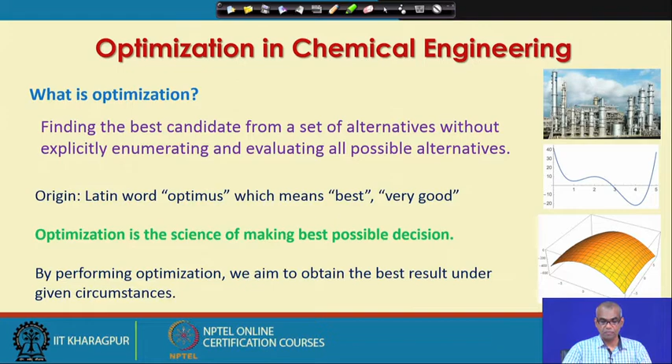So, why do you want to optimize? In general terms, we want to improve the process to realize maximum system potential. We want to attain new or improved or more efficient designs. We want to maximize profits. We want to reduce the cost of production. Maybe we want to minimize the harmful effect on the environment.

In chemical engineering, we would like to perform optimization to utilize raw materials or resources, energy, utility in the most efficient way. Also to reduce waste generation, minimize the environmental impact, to determine the most desirable operating conditions, to determine the safe operating conditions, to meet product specification, to maximize profit.

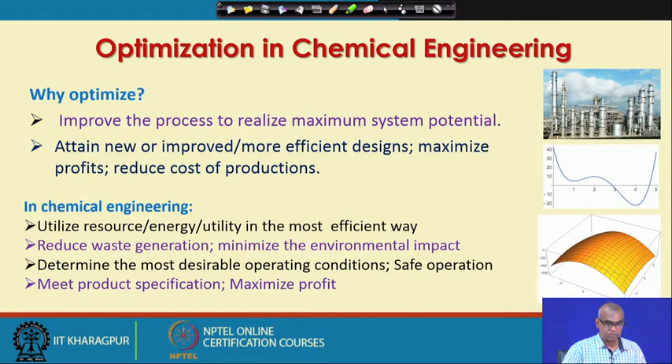So, the benefits of optimization in a chemical process plant may be improved plant performance. So, in plant operations, benefits of optimization arise from improved plant operation or performance, such as improved yields of valuable products, reduced energy consumption, higher processing rates, reduced maintenance cost, less equipment wear and longer times between shutdowns.

So, with these descriptions, we find out that during optimization, we want to maximize or minimize something. Oftentimes, we want to maximize, say, profit, we want to minimize cost. But it is not necessary that we will maximize or minimize an economic criterion. We can also maximize or minimize a technical criterion.

Let us now look at the picture of this distillation column. So, it is a schematic of a simple distillation column with one feed stream that enters somewhere in the middle of the distillation column as shown in the schematic. The vapor comes out from the top of the distillation column, is condensed using a condenser, and gets accumulated in the reflux drum. A part of it is taken out as the top product and a part of it is sent back to the distillation column as reflux.

Similarly, at the bottom of the distillation column there is a reboiler. So, the bottom liquid stream that comes out of the distillation column is vaporized using the reboiler and enters again into the distillation column. A part of the bottom product is taken out as product.

Now, what are the optimizations that can be performed in this single distillation column? If you have done a course on separation processes or mass transfer operations, you have seen that there is an optimum location of the feed tray. So, this feed stream has to be put into an optimal location. You also perhaps have seen that using this reflux stream, it is possible to control the purity of the top product.

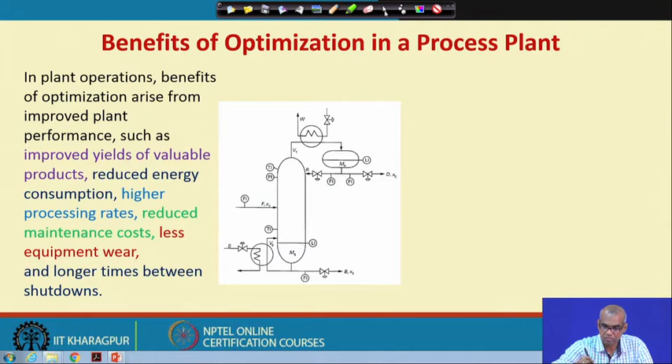So, let us take a look at a few more examples of optimization from chemical engineering. Design of heat exchanger network is an important optimization task for chemical engineers. Real time optimization of a distillation column, model predictive control. This is basically a control algorithm, but the control algorithm works on the principle of optimization. So, model predictive control basically uses a predictive model for a process and uses optimization techniques to establish the control of the process.

Operations planning and scheduling is a very important optimization task. Equipment sizing, scheduling maintenance and equipment replacement. Operating equipment such as reactors and columns, you have to design them in the most optimal manner possible. Optimal shutdown and optimal startup of plants are also important optimization tasks of practicing chemical engineers. So, these are just some of the common optimization problems chemical engineers frequently deal with.

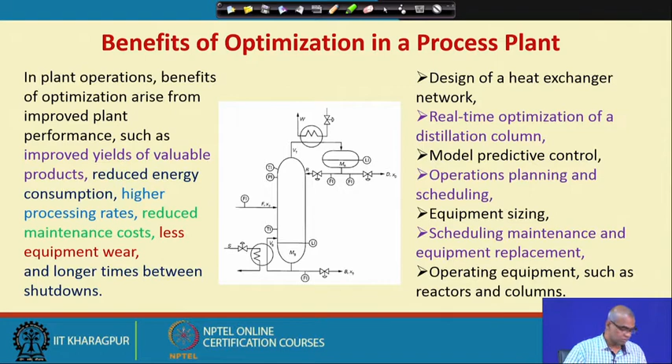These are some optimization examples where we have learned from nature. See, the wings of the aeroplane, or the design of the wings of the aeroplane, has been inspired by the birds. The nose of the high speed train is inspired by the beak of the kingfisher.

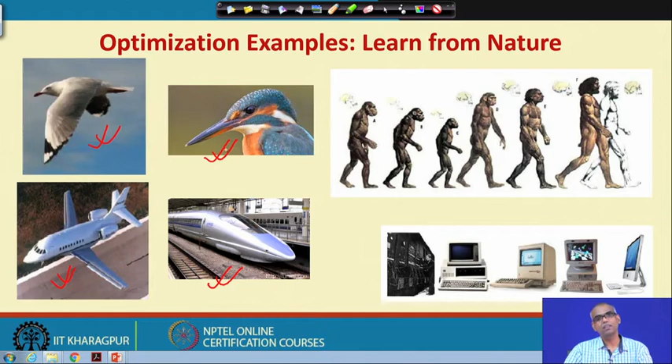You are familiar with this figure. You must have noticed this figure in your biology book. This shows human evolution, and this shows the evolution of our computers, with this being the modern desktop computer.

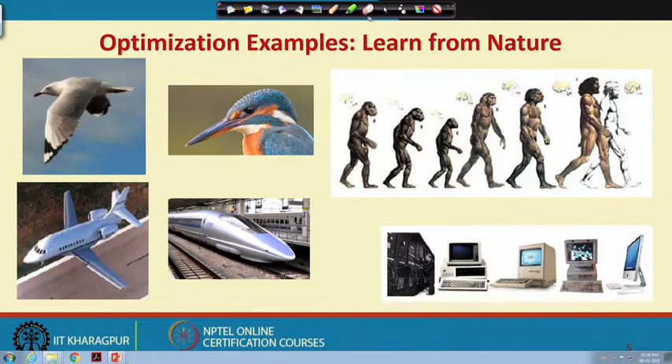So, let us now briefly talk about the outline of the course. In the first week, we will talk about introduction to optimization. Week 2, we will talk about optimization problem formulation. Week 3 and 4, we will talk about basic concepts of optimization. Week 5, 6 and 7, we will talk about unconstrained single and multivariable optimization.

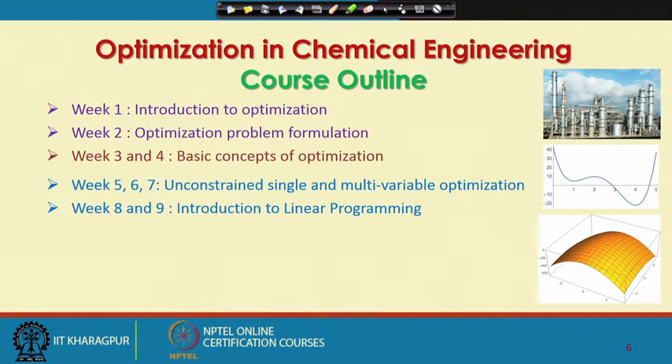Week 8 and 9, we will talk about linear programming. Week 10, we will talk about constrained nonlinear programming. Week 11, we will talk about applications of optimization, where we will talk about various case studies and apply the techniques that we have learned till week 10. And finally, in the last week, week 12, we will introduce certain software tools for performing optimization.

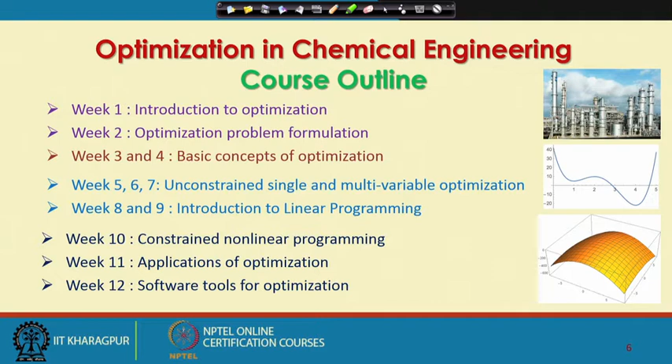These are the textbooks or reference books that you can follow. First book is Optimization of Chemical Processes by T. F. Edgar, D. M. Himmelblau and L. S. Lasdon, second edition, McGraw-Hill. Book number 2, Engineering Optimization: Methods and Applications, written by A. Ravindran, K. M. Ragsdell and G. V. Reklaitis, second edition, Wiley India. Book number 3, Engineering Optimization: Theory and Practice, S. S. Rao, fourth edition, John Wiley and Sons, Incorporated.

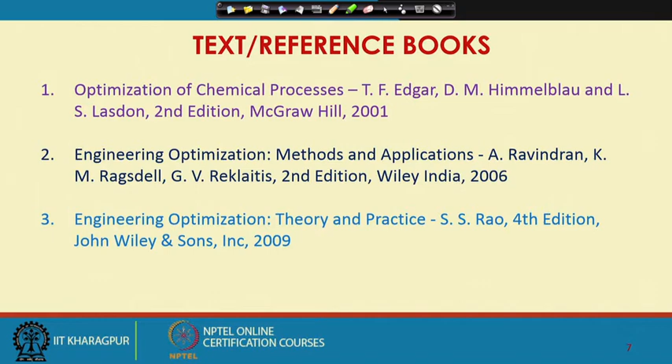So, our discussions will essentially be focused on these 3 books, but I believe you can follow any of these books. The first book, Optimization of Chemical Processes, is written by chemical engineers. The second book, Engineering Optimization: Methods and Applications, is also written by at least one chemical engineer, G. V. Reklaitis. Engineering Optimization: Theory and Practice by S. S. Rao is also a good book, but most of the examples in this book will be from civil engineering or mechanical engineering disciplines.

Optimization is not only for chemical engineers. Optimization by itself is a discipline, and this has wide areas of applications. Just to name a few: production planning, important for large scale production. You have to choose the best plant site, you have to choose the most favorable operating conditions. Transport and logistics. Optimization plays a very important role in the business of transport and logistics. Important problems are routing of vehicles, like routing of trucks, allocation of empty wagons, fuel transport, etc. Packing problem is another classical optimization problem. Design of cargo space is an important practical problem.

Telecommunication: design of network, frequency allocation of a mobile network are important practical optimization problems. Traffic planning: here traffic signal control is an important optimization problem. Structural design, such as mechanical design. Preparing timetables, staff control of your organization, are important optimization problems. Portfolio optimization is an important optimization problem in the financial sector,

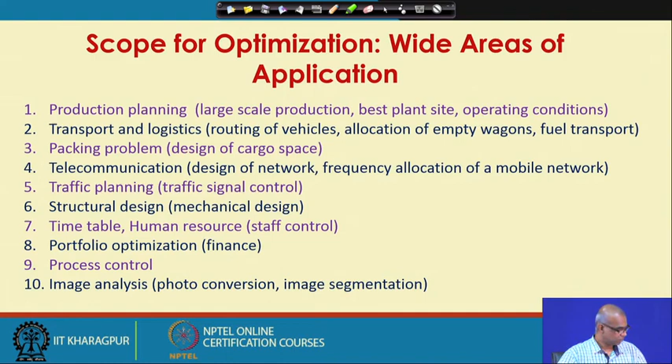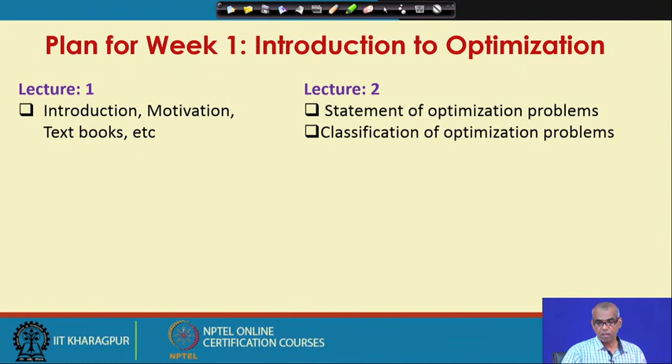So, let us take a look at the plan for the first week. In lecture 1, we try to introduce very briefly what is optimization, what is the motivation for optimization. We introduce the textbooks. In lecture 2, we will talk about statement of optimization problems and classification of optimization problems. Lecture 3, we will take some examples of engineering applications, and lectures 4 and 5 we will review linear algebra, particularly matrix algebra, that may be required for learning optimization techniques later in the course.

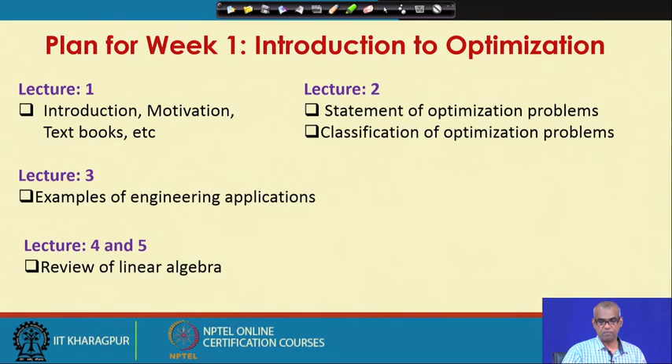So, with this I would like to stop lecture 1 here.